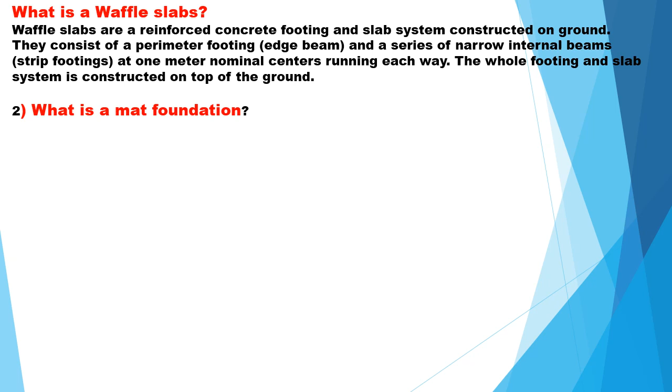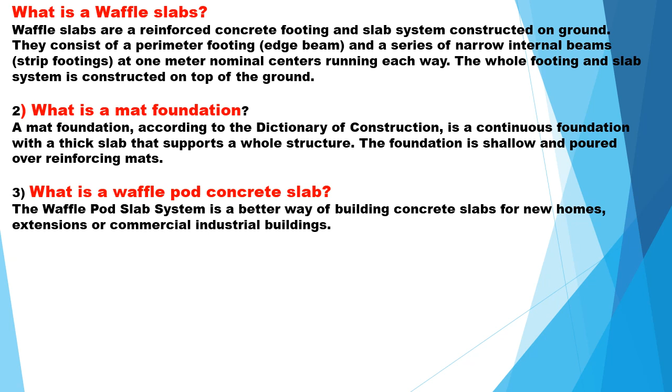What is a mat foundation? A mat foundation, according to the Dictionary of Construction, is a continuous foundation with a thick slab that supports a whole structure. The foundation is shallow and poured over reinforcing mats. What are waffle pod concrete slabs? The waffle pod slab system is a better way of building concrete slabs for new homes, extensions, or commercial and industrial buildings.

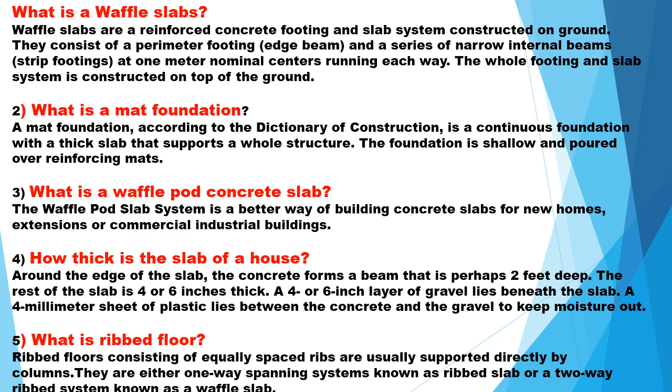How thick is the slab of a house? Around the edge of the slab, the concrete forms a beam that is perhaps 2 feet deep. The rest of the slab is 4 to 6 inches thick. A 4 to 6 inch layer of gravel lies beneath the slab. A 4 millimeter sheet lies between the concrete and the gravel.

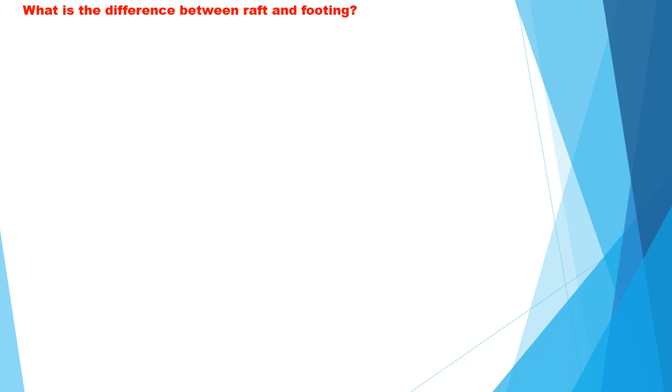What is the difference between a raft and a footing? A raft foundation is a thick concrete slab reinforced with steel that covers the entire contact area of the structure like a thick floor. A mat is necessary when the permissible soil pressure is low or where the columns and walls are so close that individual footings would overlap or nearly touch each other.

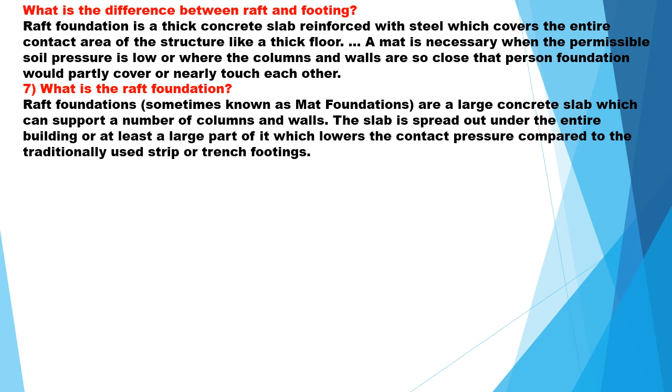What is a raft foundation? Raft foundations are a large concrete slab which can support a number of columns and walls. The slab is spread out under the entire building or at least a large part of it, which lowers the contact pressure compared to the traditionally used strip or trench footings.

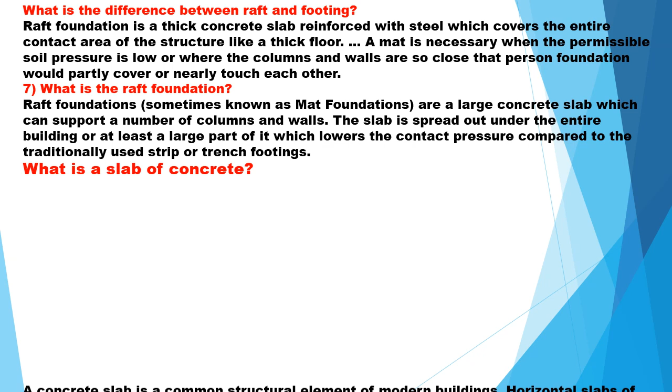What is a concrete slab? A concrete slab is a common structural element of a modern building. Horizontal slabs of steel reinforced concrete, typically between 4 and 20 inches thick, are most often used to construct floors and ceilings, while thinner slabs are also used for exterior paving.

What is meant by a suspended slab? Suspended slabs are above ground level slabs which are not directly in contact with the earth. They are commonly used to create floors for the upper stories of a house, but can also be set on top of pre-constructed walls to form a ground floor.

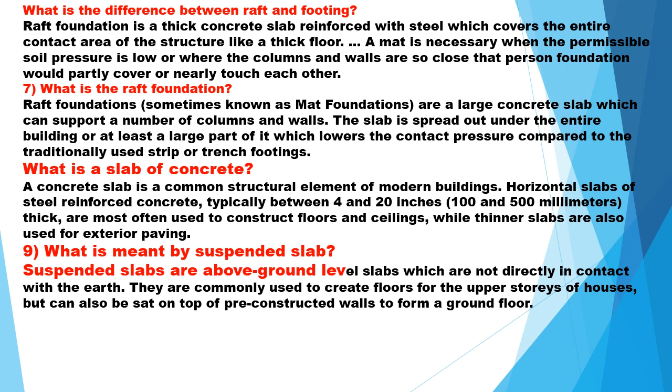How thick is the concrete? How thick is the foundation of the house? Poured concrete foundation walls that are less than 8 feet tall and have soil outside that is 6 or 7 feet deep against the wall can often be 8 inches thick and function quite well. As soon as you go higher or have a greater depth of soil pushing against the walls, you need to increase the thickness to 10 inches.

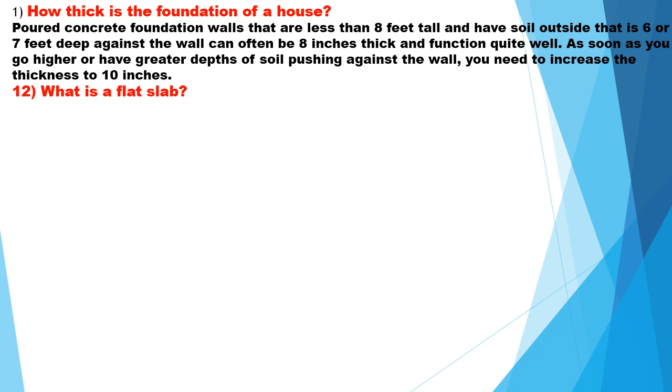What is a flat slab? A flat slab is a two-way reinforced concrete slab that usually does not have beams and girders, and the loads are transferred directly to the supporting concrete columns. For a more detailed definition, flat slab floor systems definition and description, you can check it out.

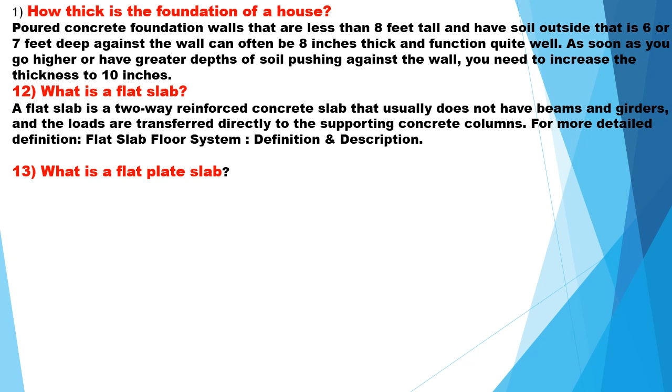What is a flat plate slab? The flat plate is a two-way reinforced concrete framing system utilizing a slab of uniform thickness, the simplest of structural shapes. The flat slab is a two-way reinforced structural system that includes either drop panels or column capitals at columns to resist heavier loads and thus permit longer spans.

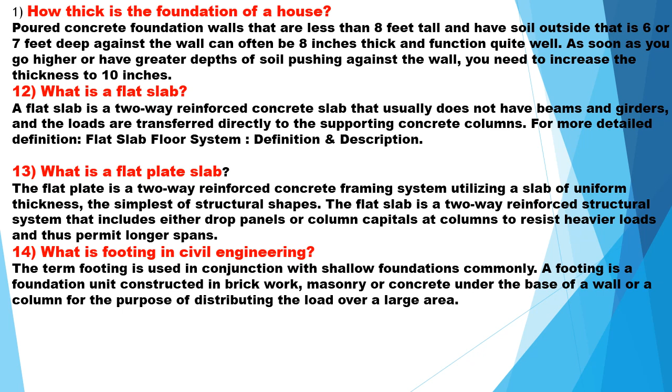What is the footing in civil engineering? The term footing is used in conjunction with shallow foundations. Commonly, a footing is a foundation unit constructed in brickwork, masonry or concrete under the base of a wall or a column for the purpose of distributing the load over a large area.

What is a concrete raft slab? A raft slab is a reinforced concrete slab that is strengthened with integral concrete beams in both directions.

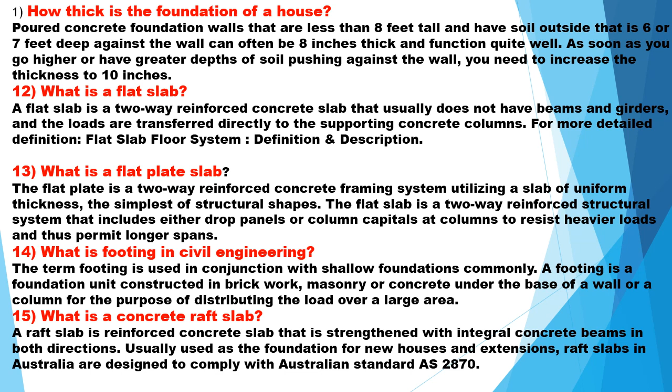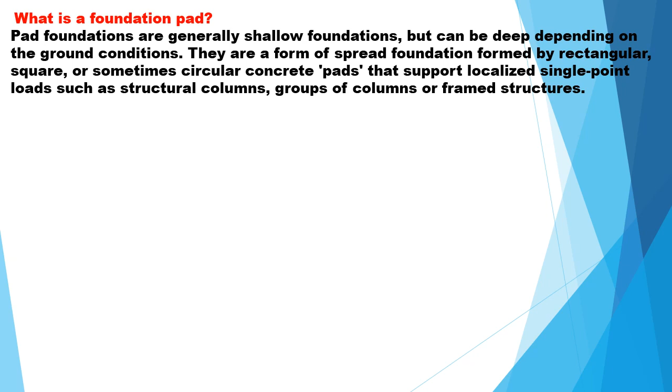What is a slab foundation? Slab-on-grade foundation. As the name suggests, a slab is a single layer of concrete several inches thick. The slab is poured thicker at the edges to form an integral footing. Reinforcing rods strengthen the thickened edges. The slab normally rests on a bed of crushed gravel to improve the drainage system.

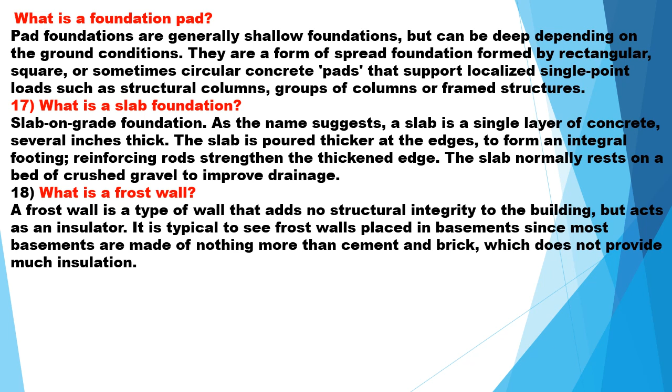What is a frost wall? A frost wall is a type of wall that adds no structural integrity to the building but acts as an insulator. It is typical to see frost walls placed in basements, since most basements are made of nothing more than cement and brick, which does not provide much insulation.

What is a slab in civil engineering? Concrete slabs, a very common and important structural element, are constructed to provide flat, useful surfaces. It is a horizontal structural component with the top and bottom surfaces parallel or near so. The depth of the concrete slab floor is very small compared to its span.

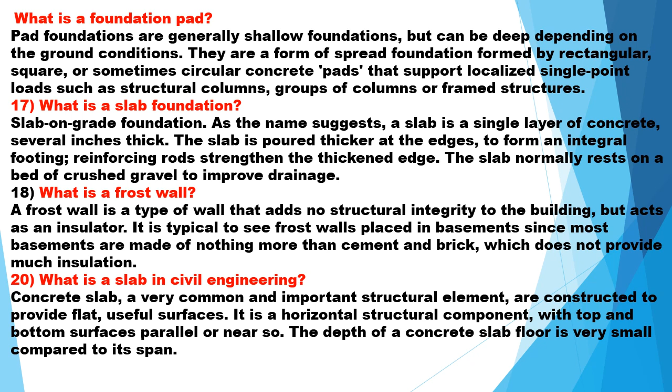How thick is the concrete in the garage floor? The form should have a slight slope so that water runs away from the area instead of pooling on your garage floor. The slope should be steeper if you have a sink or a water heater in the garage. Pour and level the concrete. A standard garage floor is typically 4 inches thick, that means 100 mm thick.

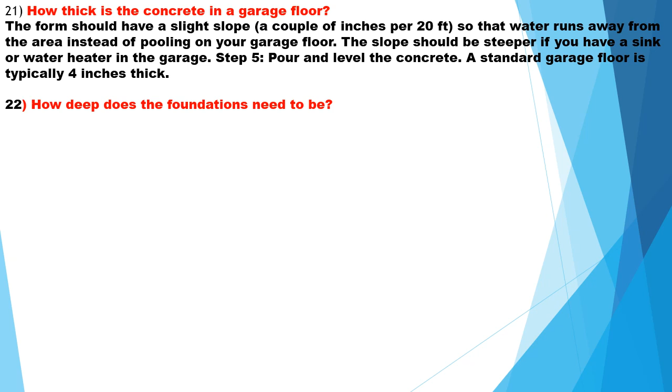How deep is the foundation to be? The projection of the footing on either side of the wall is supposed to be no greater than the depth of the footing. The bottom of the footing should be at least 12 inches below the finished grade line, I mean the surface of the ground. It may need to be deeper; it must be below the frost line.

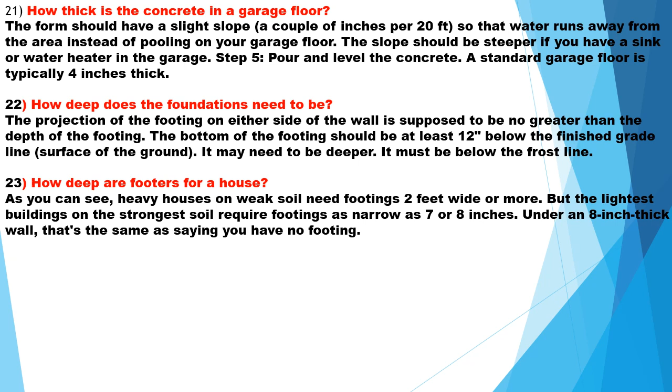How deep are footers for a house? As you can see, heavy houses on a weak soil need footings 2 feet wide or more. But the lightest building on the strongest soil requires footings as narrow as 7 to 8 inches under an 8-inch thick wall, that is the same as having no footing.

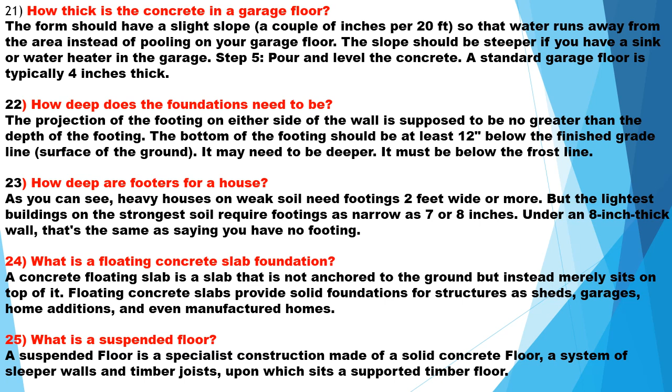What is meant by a one-way slab? A one-way slab is supported by beams on only two sides. The ratio of the longer span panel to the shorter span panel is equal to or greater than 2. Thus, length divided by breadth is greater than or equal to 2. Main reinforcement is provided only in one direction for one-way slabs.

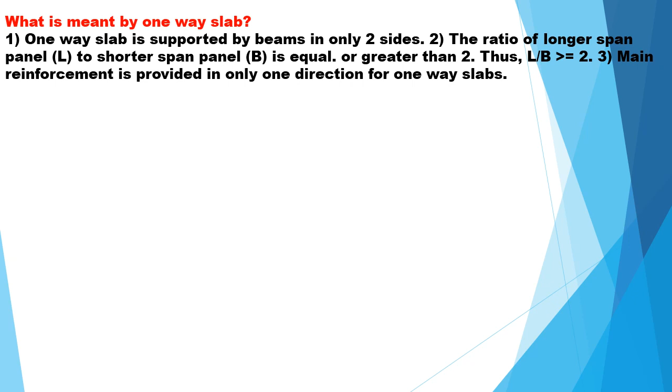What is a coffer slab? A coffer in architecture is a series of sunken panels in the shape of a square, a rectangle or an octagon in a ceiling, soffit or vault.

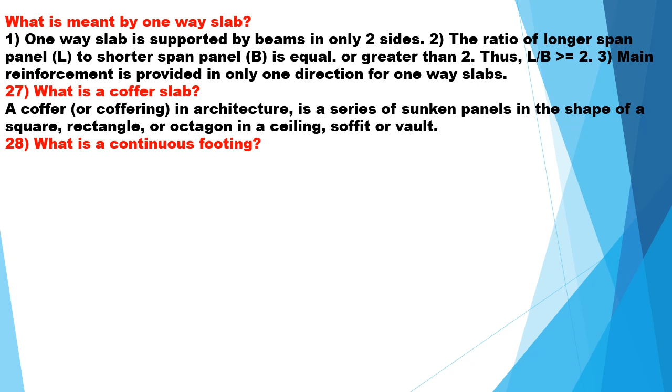What is a continuous footing? A strip footing is a type of shallow foundation which is provided for load bearing walls and for economic purposes, in rows of columns which are so closely spaced that the spread footings overlap or nearly touch each other. Strip footing is also known as continuous footing. What are concrete strip footings? A wall footing or strip footing is a continuous strip of concrete that serves to spread the weight of the load bearing wall across an area of soil. It is a component of a shallow foundation.

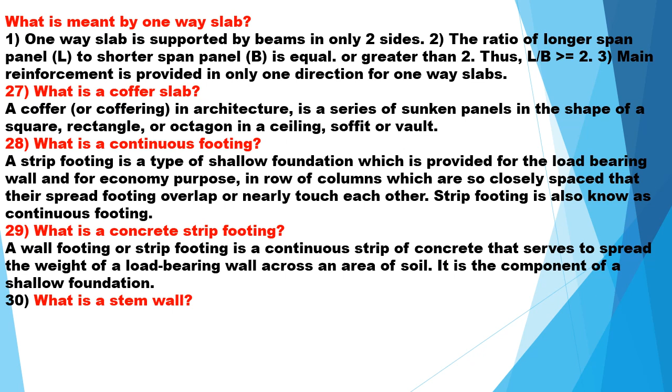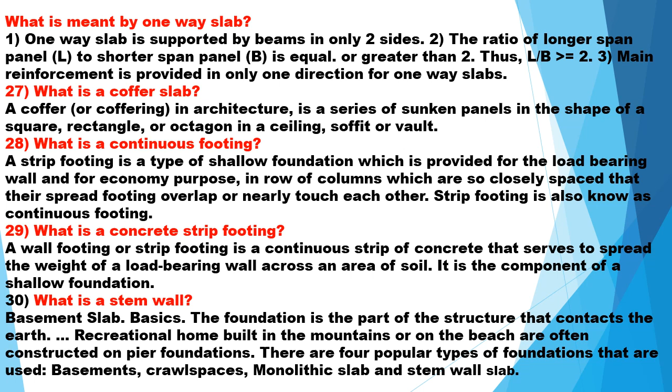What is a stem wall? Basement slab basics. The foundation is the part of the structure that contacts the earth. Recreational homes built in the mountains or on the beach are often constructed on pier foundations. There are 4 popular types of foundation that are used: basements, crawl spaces, monolithic slabs and stem wall slabs.

What is meant by punching shear? Punching shear is a type of failure of reinforced concrete slabs subject to high localized forces. In flat slab structures, this occurs at column support points.

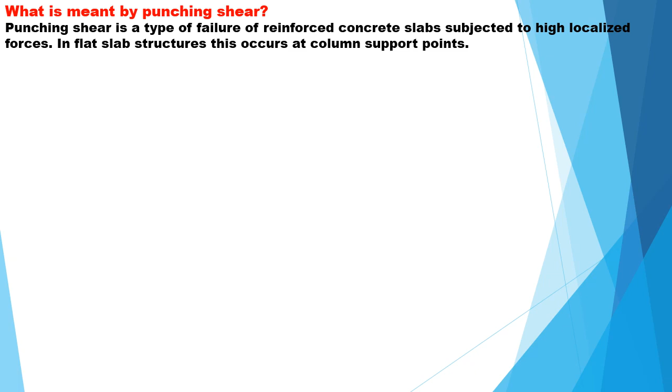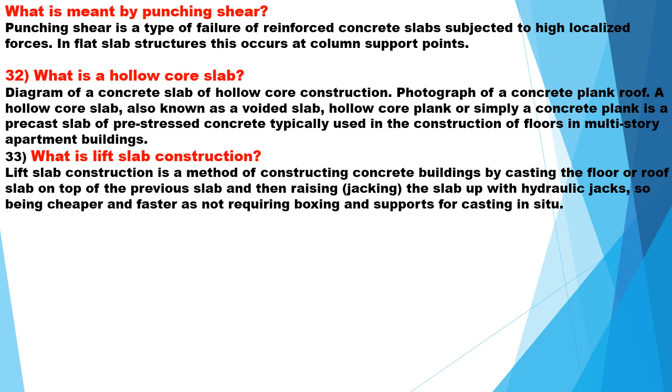What is lift slab construction? Lift slab construction is a method of constructing concrete buildings by casting the floor or roof slab on top of the previous slab and then raising the slab up with hydraulic jacks. It is cheaper and faster, as it does not require boxing and supporting as with cast in situ.

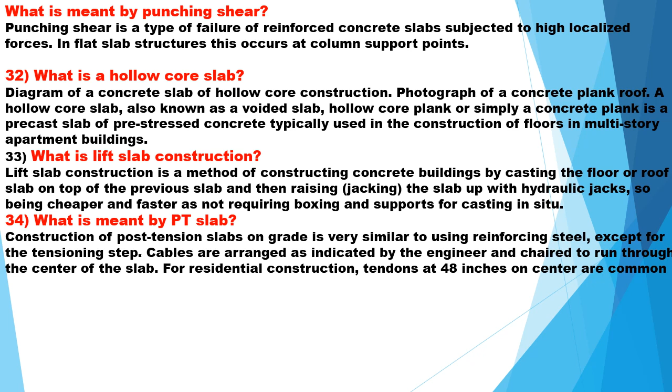What is meant by a PT slab? Construction of a post-tension slab on grade is very similar to using reinforcing steel, except for the tensioning step. Cables are arranged as indicated by the engineer, on chairs, to run through the center of the slab. For residential construction, tendons at 48 inches are common.

What are the foundations of a building? A foundation is the element of an architectural structure which connects to the ground and transfers loads from the structure to the ground. Foundations are generally considered either shallow or deep.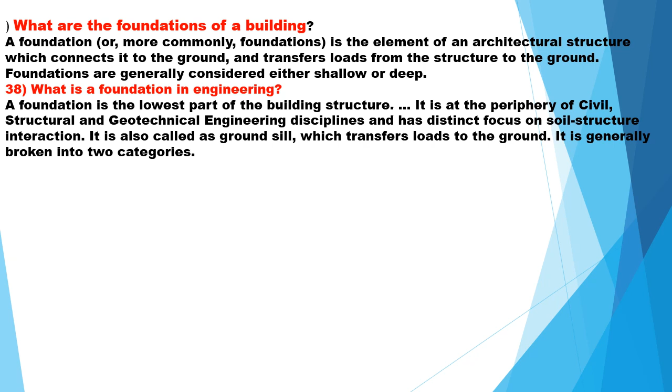What is a foundation in engineering? A foundation is the lowest part of the building structure. It is a periphery of the civil and structural geotechnical engineering disciplines and has a distinct focus on soil-structure interaction. It is also called a ground sill, which transfers loads to the ground. It is generally broken into 2 categories.

What is meant by footing in construction? Footings are an important part of foundation construction. They are typically made of concrete with rebar reinforcement that has been poured into the excavated trench. The purpose of a footing is to support the foundation and prevent settling.

What is a spread foundation? Spread footings are square or rectangular shaped blocks of reinforced concrete that typically support a single column or a wall of a building. The allowable bearing pressure on the soil determines the size of the spread footing.

What is a waffle slab? Resembling the food after which they are named, concrete waffle slabs are reinforced concrete floors and roofs that use a square grid of deep sides. This form of construction is used in airports, parking garages, commercial and industrial buildings, bridges, residences and other structures requiring extra stability.

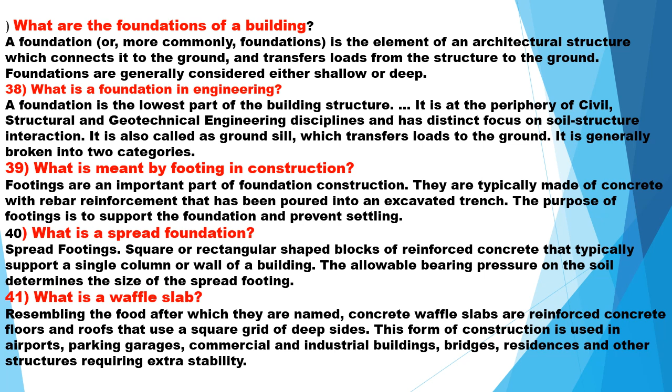What is a mat foundation? A mat foundation looks like it sounds. It is a mat of concrete that sits on or just below the ground. In other words, a shallow foundation. You may have heard it referred to as a slab foundation, a common choice among builders.

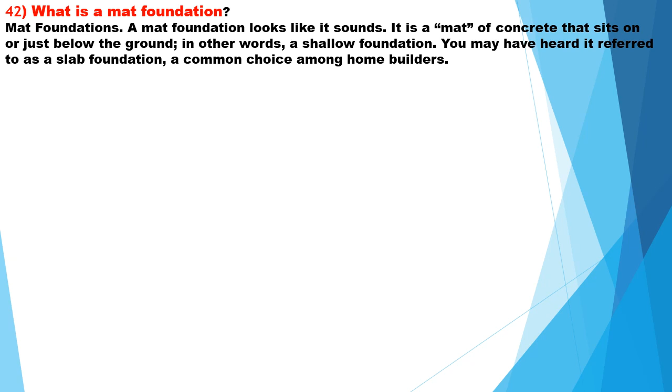What is a waffle raft slab? Waffle raft slab construction is quite different from stiffened raft and footing slab structures. The slab's ribs are formed on top of the ground using a grid of polystyrene void forms. These are laid out on a leveled area. The construction is ideally suited for reactive clay sites.

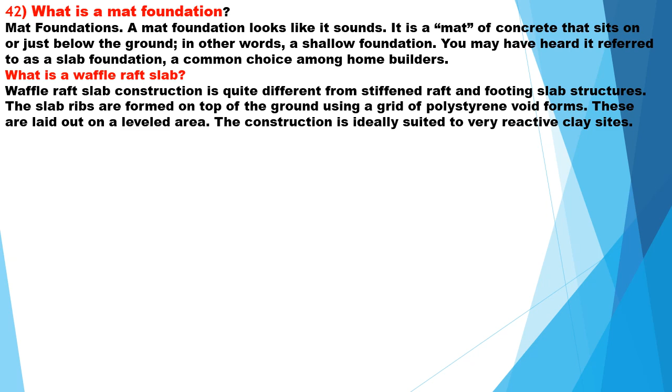What is the use of a pile foundation? Pile foundation systems relying on driven piles often have a group of piles connected by a pile cap, a large concrete block into which the heads of the piles are embedded, to distribute loads which are larger than one pile can bear.

What is a slab on grade? Slab-on-grade or floating slab foundations are a structural engineering practice whereby the concrete slab that is to serve as the foundation for a structure is formed from a mold set in the ground. The concrete is then placed in the mold, leaving no space between the ground and the structure.

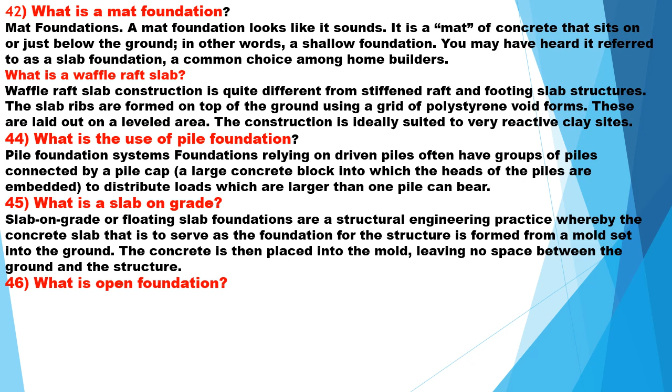What is an open foundation? Open foundation is a tertiary preparation program.

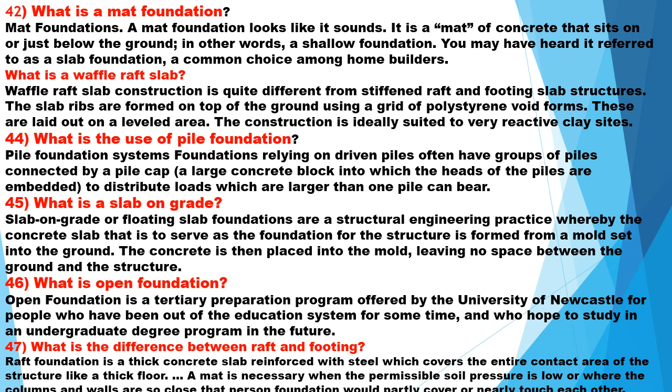What is the difference between a raft and a footing? A raft foundation is a thick concrete slab reinforced with steel which covers the entire contact area of the structure like a thick floor. A mat is necessary when the permissible soil pressure is low or where the columns and walls are so close that individual foundations would partly cover or nearly touch each other.

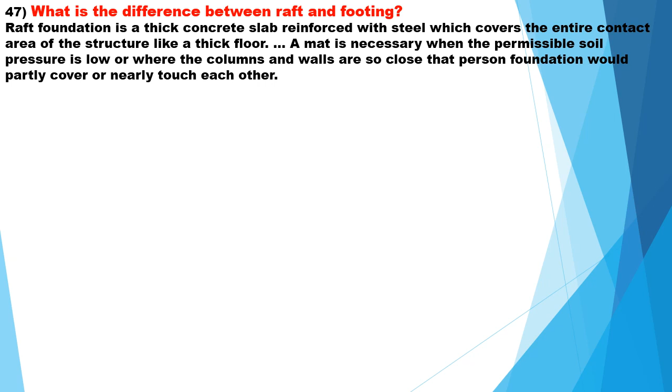How thick is the concrete foundation slab? Around the edge of the slab, the concrete forms a beam that is perhaps 2 feet deep. The rest of the slab is 4 to 6 inches thick. A 4 or 6 inch layer of gravel lies underneath the slab.

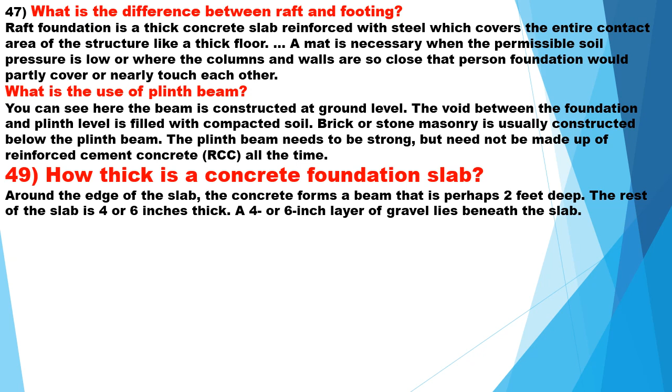What does grade mean? In real estate, above grade means the portion of the home that is above the ground. The term is usually used to describe rooms or square footage. For example, 3 bedrooms above grade means 3 bedrooms that are not in the basement.

What does monolithic slab mean? Monolithic slabs are a foundation system constructed as one single concrete pour that consists of a concrete slab with thickened portions of the slab under load-bearing walls and all perimeter edges that take the place of footers.